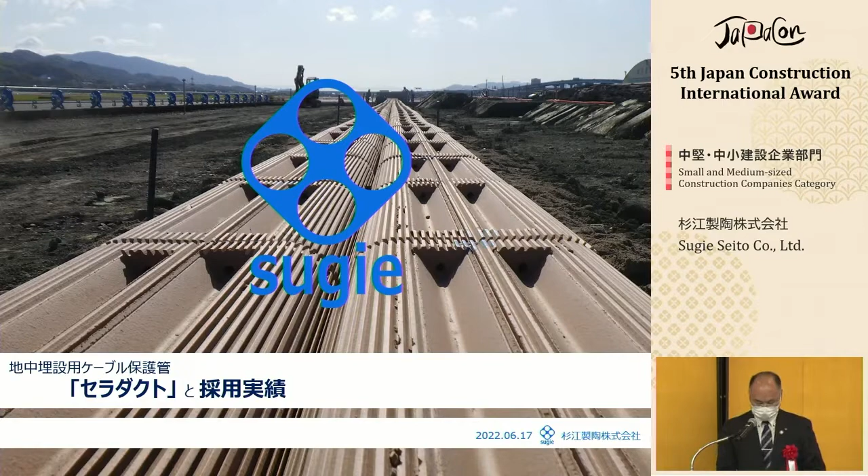I'm Hiroyuki Sugie from the sales department of Sugie. I'm very, very honored to be standing here in front of you all to be receiving this prestigious award. The cable protection pipes for underground installation, CERA-DUCT, and our track record is what I'd like to cover in my short presentation.

First of all, about our company. We're based in Aichi Prefecture, with factories there too, and we have branches in East Japan, West Japan, and Singapore. We manufacture and sell perforated ceramic pipes for underground cable protection. Back in 1906 is when we established our business as Sugie Pottery.

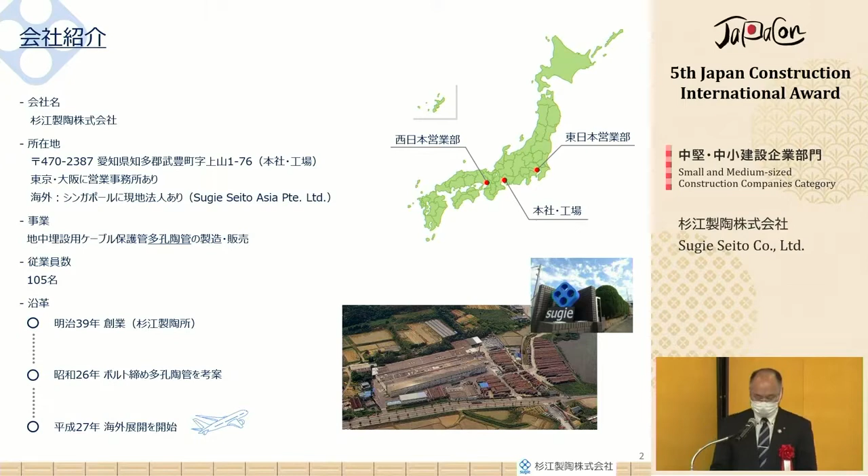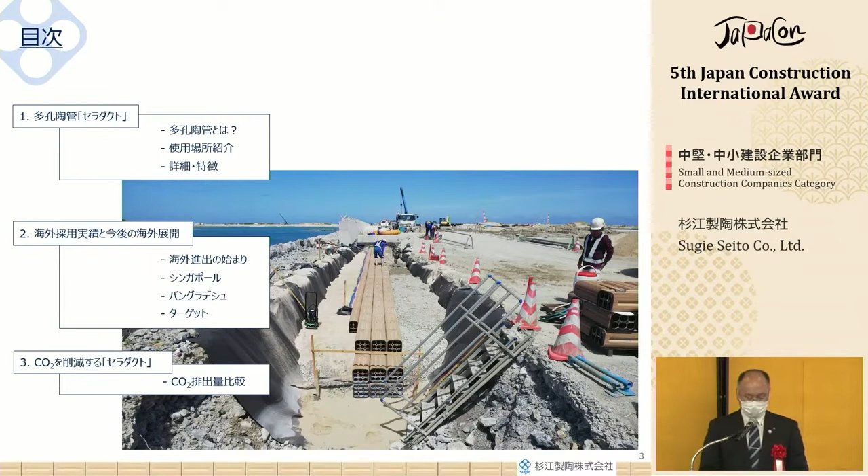There are three items I'd like to cover in this presentation. First is the perforated ceramic tubes, what it is, the CERA-DUCT. Second topic will be how we've been doing our business overseas. And three is the CERA-DUCT's contribution to reducing CO2 emissions.

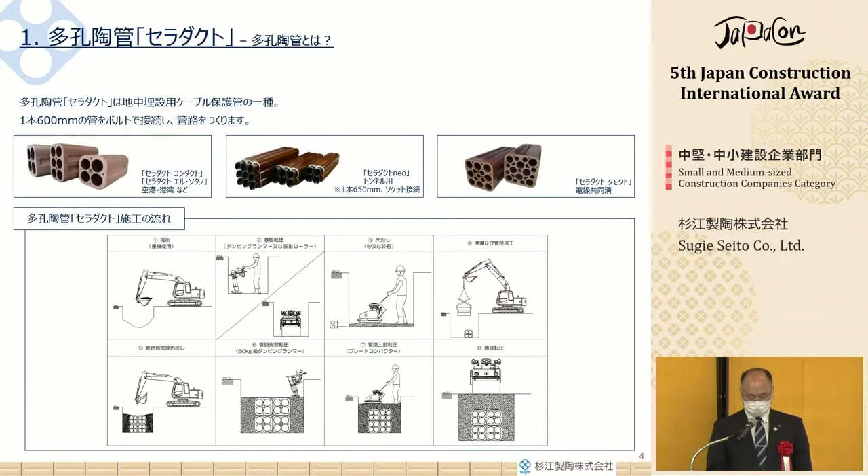First, what is a CERA-DUCT, the perforated ceramic tubes that we manufacture? This is a quite versatile tube. We can shape them in many different forms, and that's used in many different construction sites, including airports, ports, tunnels, power stations, etc., and also underground tunnels for electric cables.

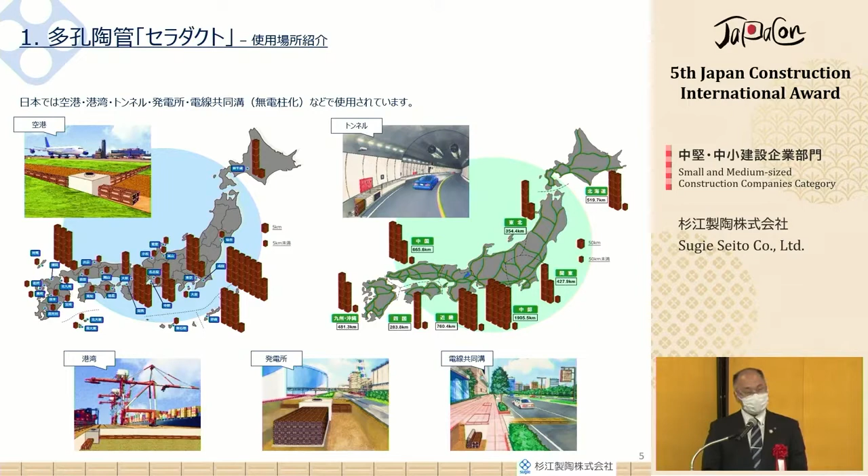We have a track record of this being used in 30 different airports. For tunnels, this has been very valuable material because it is fire resistant, and it's a very efficient cable duct for very limited space.

With a great track record inside Japan, we've decided to go global with the CERA-DUCT Global. We have three advantages to this product. First, the cross-section of the duct line is very compact. Second, the compressive strength is excellent. And third, the product construction is super simple.

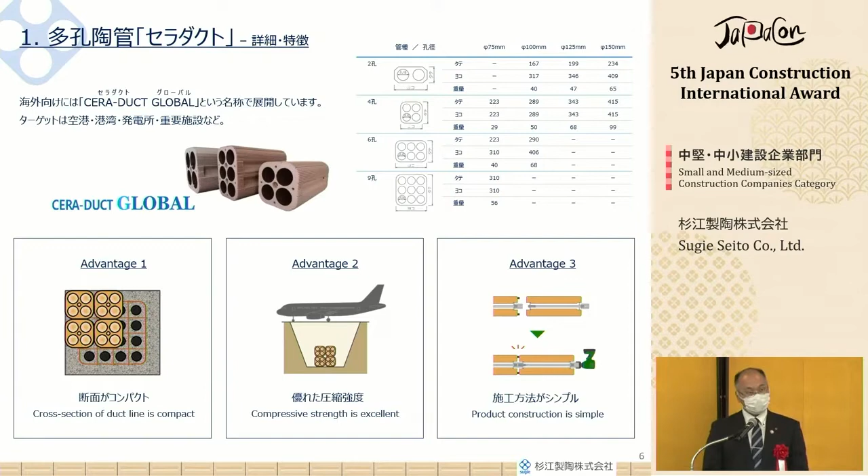Because of these advantages, we can minimize the cost and shorten the lead time that our clients need in achieving their goal. We've been supported by many business partners in building up a great track record for CERA-DUCT.

It's quite heavy material, so at the beginning many people thought that it would be difficult to export. It wouldn't make sense economically. But we had a project in Okinawa, and we discovered that the transportation cost is not as much as we thought. So we started going global, but we had no track record doing business outside, and it was very, very difficult to break the barrier.

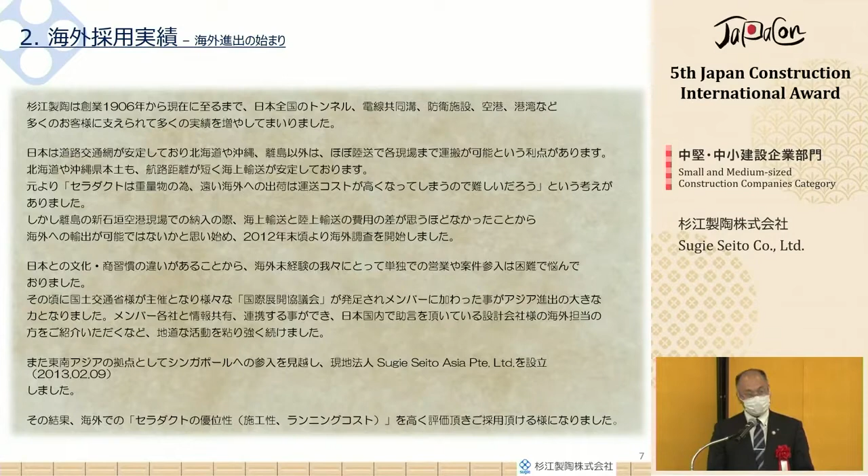But there was this international business promoting workshop led by the Ministry of Land, Infrastructure, Transport and Tourism. We took part in those initiatives, and we gradually started making a presence and gradually built up success.

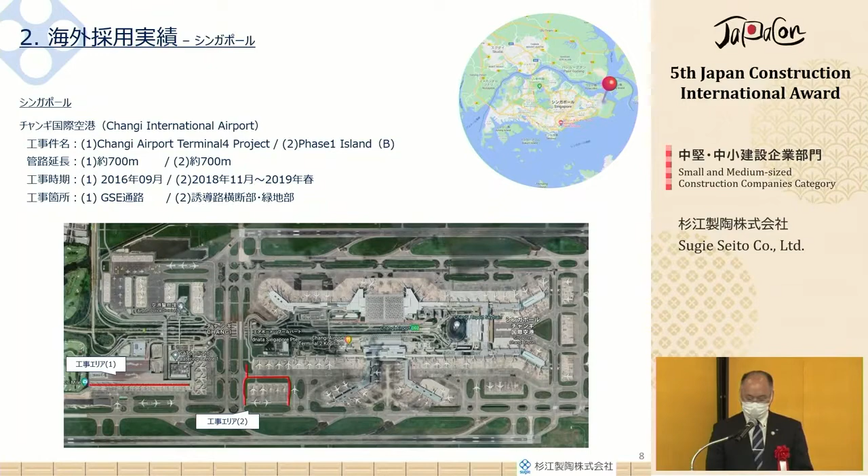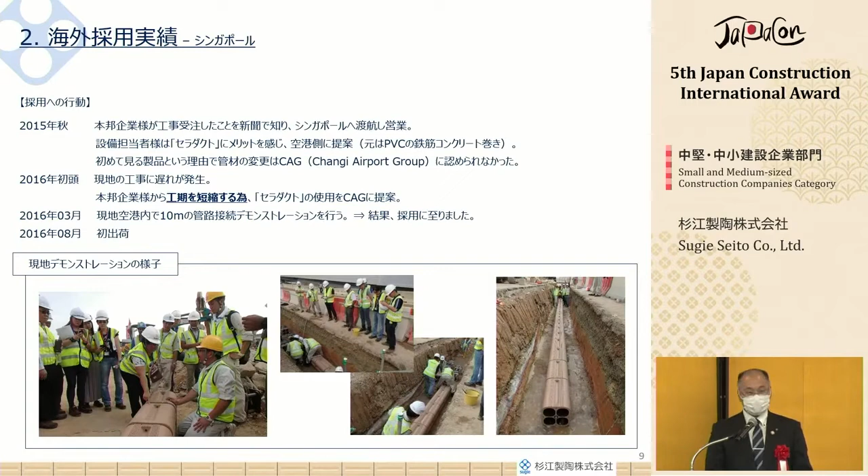This is Singapore, Changi International Airport. We had two phases, two projects, one 700 meters, another also 700 meters. It started back in 2016 and was completed in 2019. We actually did a demonstration, bringing our product, showcasing how quickly they could complete the plan, and we managed to contribute to making the lead time 1/3 of the original plan.

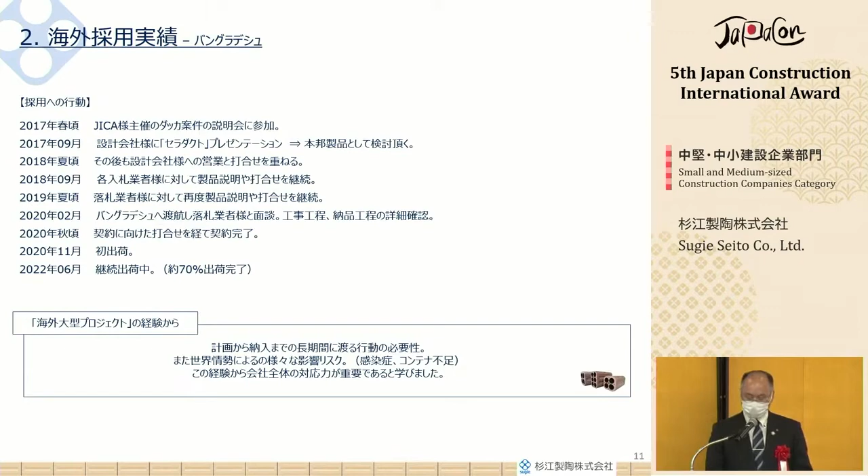This is the second one: Bangladesh, Hazrat Shahjalal International Airport. This too was impacted by COVID, and we couldn't fly freely to the local area, so we managed the project remotely from Japan.

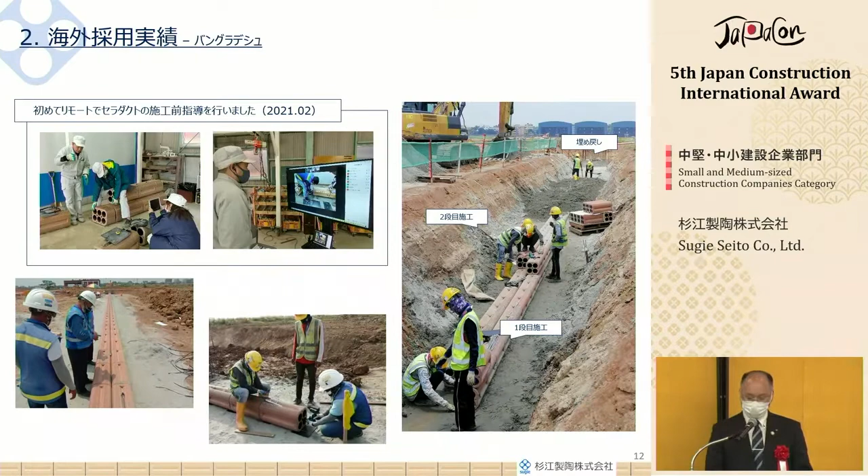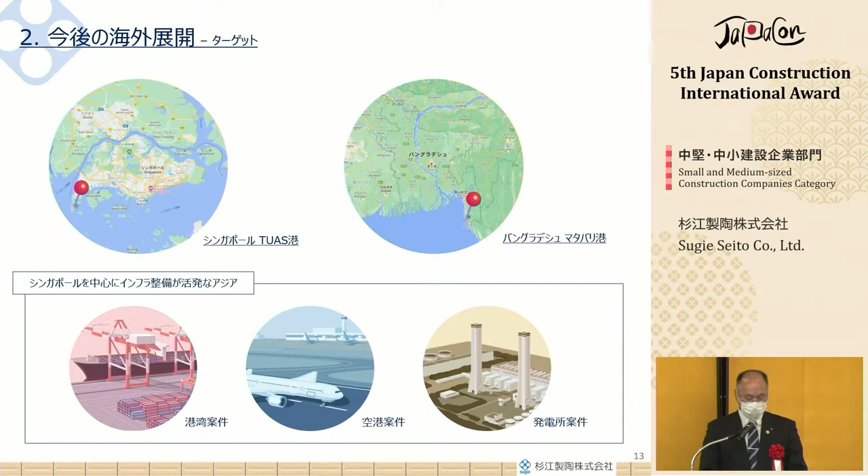We were reputed highly that our remote management worked quite effectively, that it could harness the capabilities of the local people. We'd continue to be bold outside of Japan. We have all these lead projects, and we're going to be targeting Asia, various regions, to build on our success.

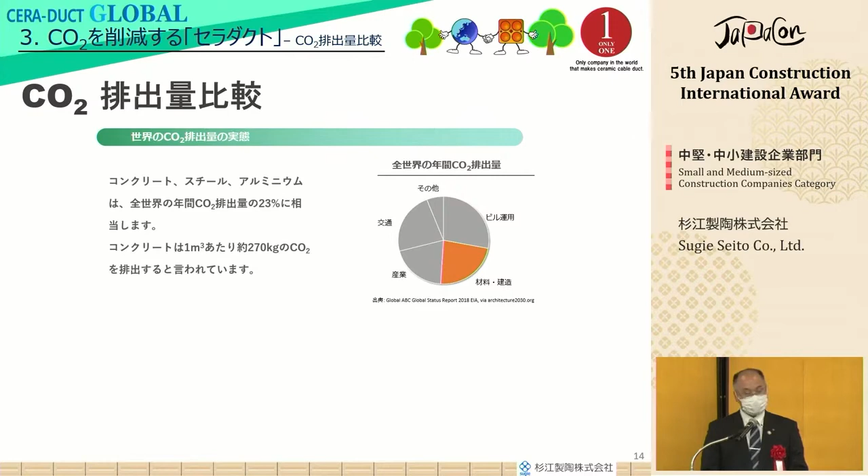This is the CO2 emission contribution we can bring with the CERA-DUCT, comparing it with regular cement or concrete. By replacing other materials with the CERA-DUCT, we can see that you can reduce as much as 70% of CO2 emission.

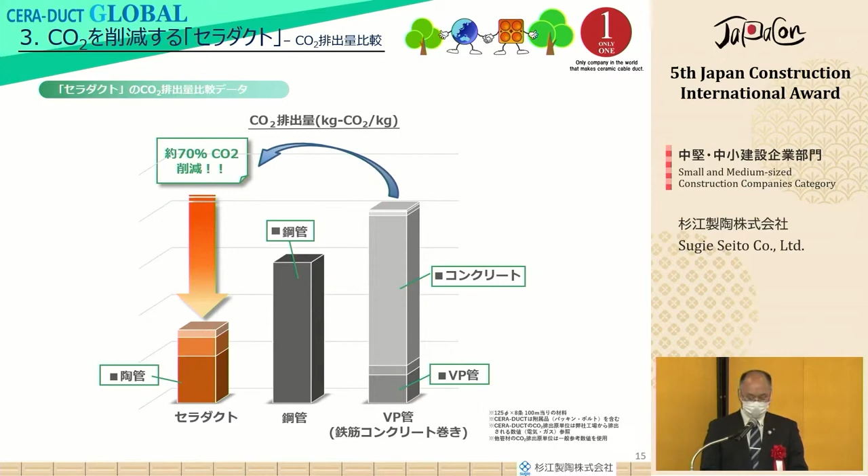We will be harnessing the strength of the ceramics, and would like to contribute to society and businesses in many different ways. Thank you very much for your listening, and thank you very much once again for the award.